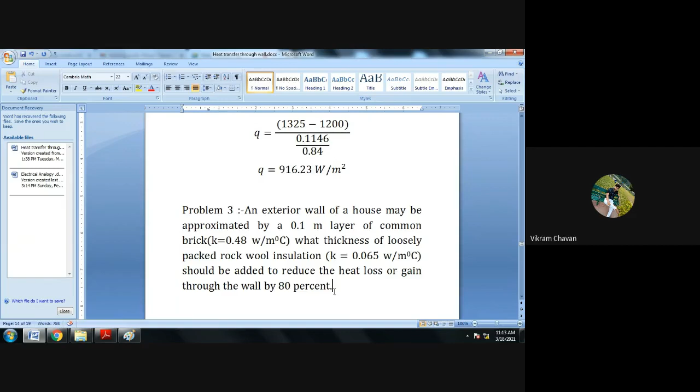So in simple language, a house is there with a wall made up of common brick, with thermal conductivity 0.48. We have to reduce the heat transfer, or heat gain, through that particular wall by 80%. So we need to find how much thickness of rock wool insulation should be provided on that wall. The given data is: thickness of common brick wall is provided, thermal conductivity of common brick is provided, and thermal conductivity of rock wool insulation is provided.

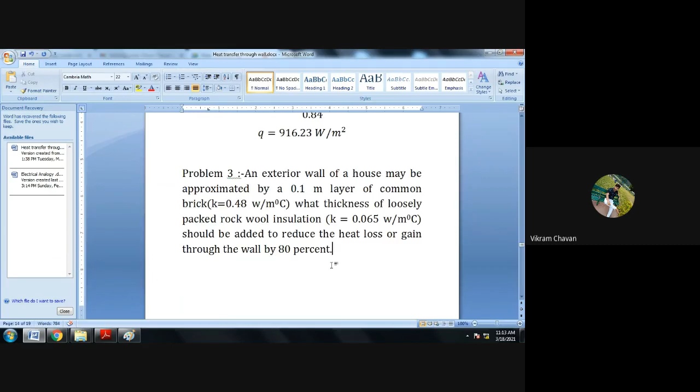We have to discuss further with this data. Okay, some mistake is there from my side. An exterior wall of a house may be approximated by a 0.1 meter layer of common brick, and the common brick thermal conductivity is 0.7, followed by...

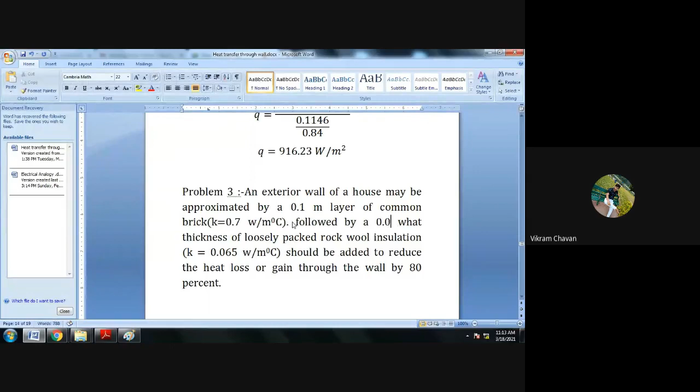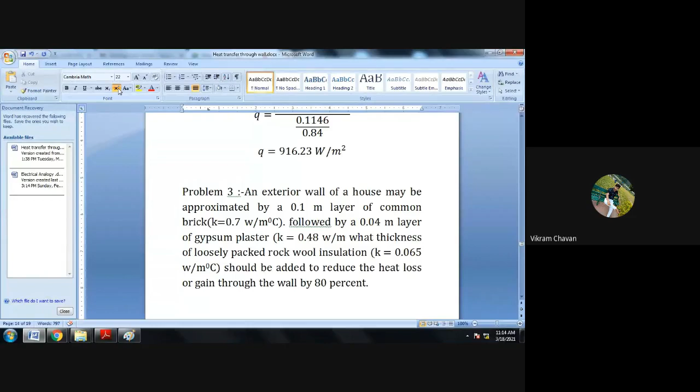...a 0.04 meter layer of gypsum plaster, with thermal conductivity provided as K is equal to 0.48 watt per meter degree Celsius.

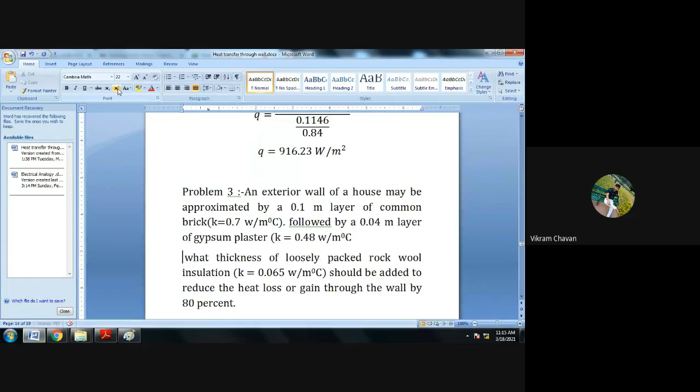Watt per meter degree Celsius. And then it is provided: what thickness of loosely packed rock wool insulation, K equal to 0.065 watt per meter degree Celsius, should be added to reduce the heat loss or gain through the wall by 80%?

So make the changes in the problem. An exterior wall of a house may be approximated by a 0.1 meter layer of common brick (thermal conductivity is 0.7 watt per meter degree Celsius), followed by a 0.04 meter layer of gypsum plaster (K is equal to 0.48 watt per meter degree Celsius).

What thickness of loosely packed rock wool insulation (K is equal to 0.065 watt per meter degree Celsius) should be added to reduce the heat loss or gain through the wall by 80%?

So the scenario is that the house wall is made up of common brick. Over that wall the gypsum plaster layer is provided, and through that particular gypsum plaster and common brick, some amount of heat is transferring across the wall, and we have to reduce that heat by 80% by adding rock wool insulation over the plaster. So what will be the thickness of that rock wool insulation?

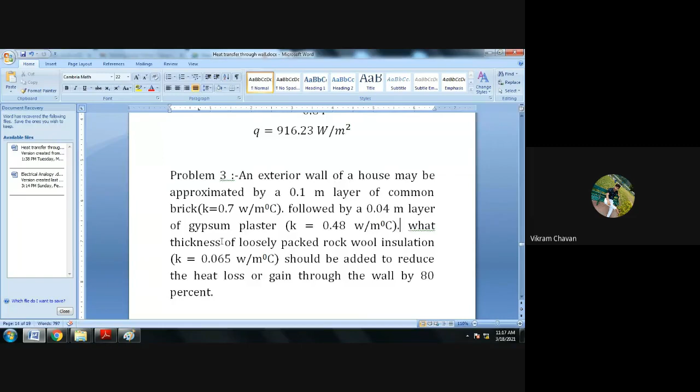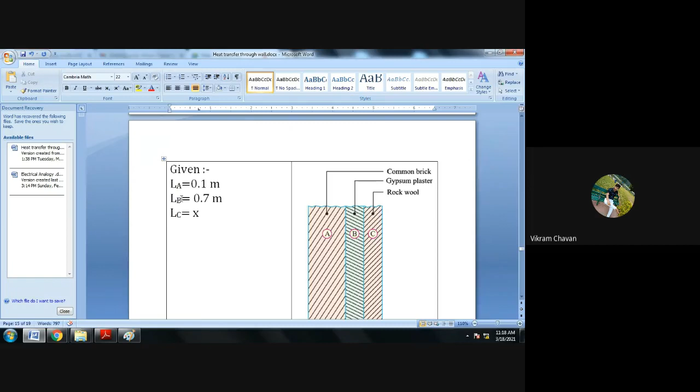Now the given data: the thickness of the common brick we consider as L suffix A, which is equal to 0.1 meter, and thickness of gypsum plaster is L suffix B, considering wall B as the gypsum plaster, with thickness 0.04 meter. We have to find out the thickness of rock wool.

Here is a diagrammatic representation you can follow in every problem for understanding purposes. What we are going to consider in the problem will be understood from the diagram only. So wall A is the common brick wall, wall B is the gypsum plaster wall, and wall C is the rock wool wall.

So the thicknesses of these walls are provided in the given data. Now we have to determine LC, that is the thickness of rock wool. Now initially, what are we going to consider?

We are going to consider that initially there is no rock wool insulation provided over the wall. So in that case, what will be the heat transfer? And in the second case, we consider when the rock wool insulation is provided, the heat transfer will be reduced by 80% of the initial heat transfer, when initially there is no rock wool insulation over the gypsum plaster.

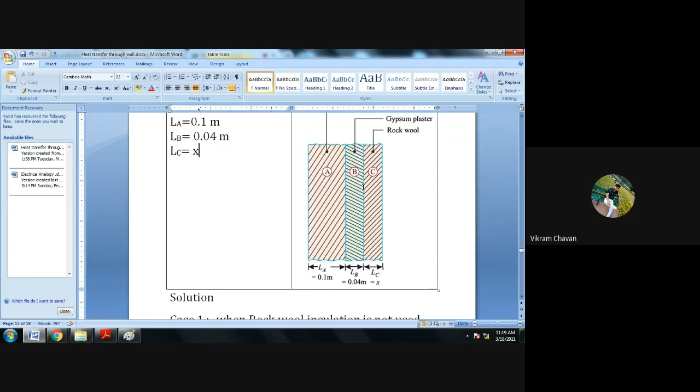So in this manner we have to solve this problem and determine the thickness LC, or the thickness of rock wool. So draw this diagram. For more visibility, you can rotate your screen and use the zoom in, zoom out feature of Google Meet.

So write down the given data: L suffix A is 0.1 meter, L suffix B is 0.04 meter, and L suffix C is X meter, which we have to determine. The unknown quantity is the thickness of rock wool insulation needed to reduce the heat transfer by 80%.

Also draw this simple one-dimensional diagram. Wall A is the common brick, wall B is the gypsum plaster, and wall C is the rock wool wall. Provide the thicknesses: L suffix A is equal to 0.1 meter, L suffix B is equal to 0.04 meter, and L suffix C is equal to X. We have to find out this X value.

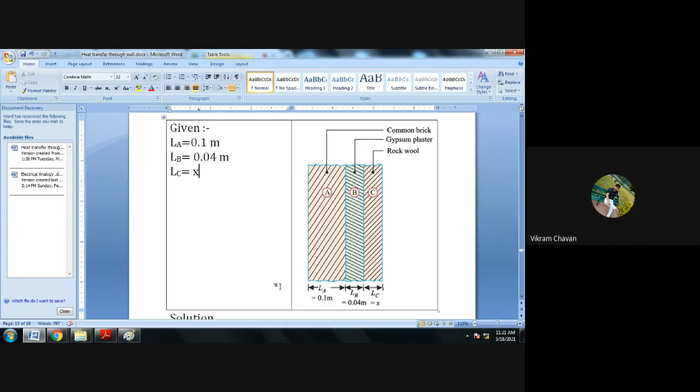So case one is when rock wool insulation is not used as the initial condition. In that case, the heat transfer across the wall we have to consider as Q1.

We can say the temperature difference across the two walls is dt, and it equals dt divided by the thermal resistance of the two walls. Thermal resistance of a wall equals L suffix A divided by K suffix A multiplied by area, where L suffix A is the thickness of wall A, K suffix A is the thermal conductivity of wall A, and area is the area perpendicular to the heat flow.

In a similar fashion, we add up the resistance of wall B, having thickness L suffix B and thermal conductivity K suffix B, multiplied by area. This is how we manipulate the equation according to the given data and parameters in the problem. This is what we have considered as case one.

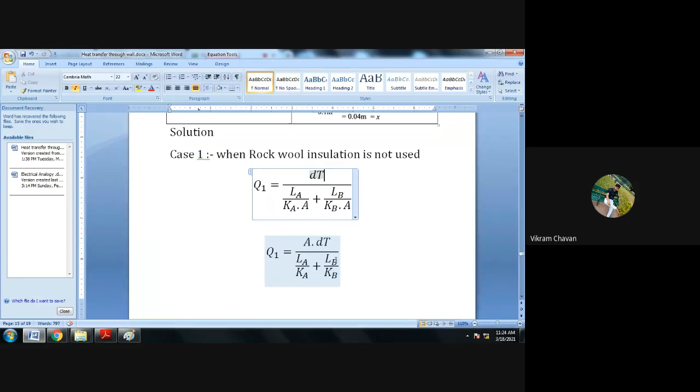L suffix A, K suffix A, and L suffix B, K suffix B go into the equation. So Q1, the heat transfer when we are not using the rock wool insulation, equals A multiplied by dt divided by thickness of wall A which is 0.1, with thermal conductivity of wall A as 0.7, plus thickness of wall B which is 0.04 divided by thermal conductivity of wall B which is 0.48. That is the heat transfer equation when we are not using the rock wool insulation.

Once we apply the rock wool insulation over the gypsum plaster, one more resistance will be added, and the heat reduction will happen by 80%. For that purpose we have to find out the thickness of the rock wool insulation.

So when rock wool insulation is used, what will be the heat transfer rate? Q2 equals A multiplied by dt, whole divided by L suffix A divided by K suffix A plus L suffix B divided by K suffix B plus L suffix C divided by K suffix C.

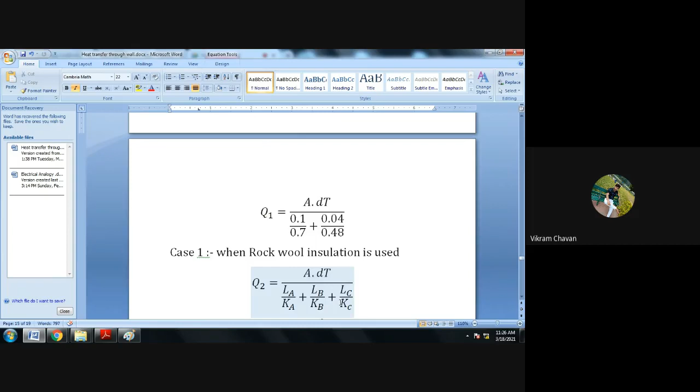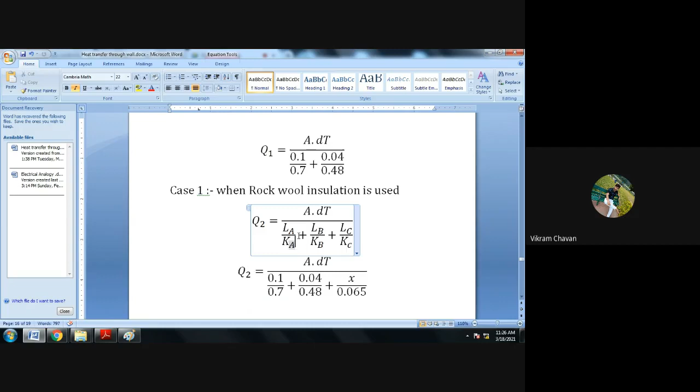We consumed this step by directly shifting capital A, the area, to the numerator side because it is common in all three terms. After getting this equation for heat transfer when rock wool insulation is used, we put in the values of all the thicknesses and thermal conductivities.

In this case, the value of L suffix C, the thickness of rock wool insulation, is unknown, so instead we consider it as X, which we have to determine. So the equation becomes A multiplied by dt divided by 0.1 divided by 0.7 plus 0.04 divided by 0.48 plus x divided by 0.065.

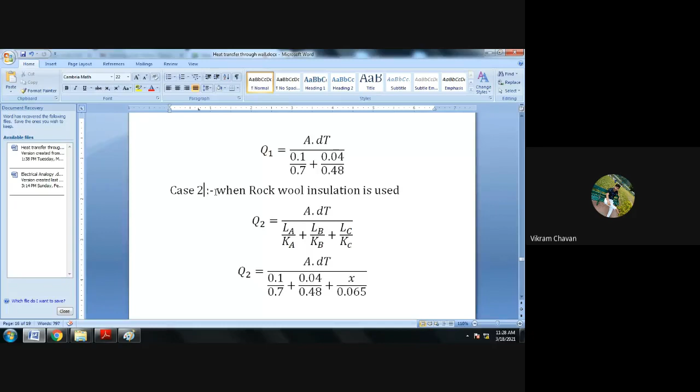Now further, according to the problem statement, we know that when we add up the rock wool insulation, the initial heat transfer rate will be reduced by 80%.

So Q2 is the heat transfer when the rock wool insulation is added. Q2 will be equal to 80% reduction in initial heat transfer. Initial heat transfer when there is no rock wool insulation present is equal to Q1. And reduction in that initial heat transfer, we have to write as minus 80% of Q1.

Q2 is the heat transfer when we add the rock wool insulation, and when rock wool insulation is added, then the heat transfer will be reduced by 80%. Initial heat transfer is when the wall is manufactured by using common brick and gypsum. So at that time, what is the heat transfer? And reduction in that heat transfer will happen by 80%.

So 80% of initial heat transfer will be reduced. So our equation will become Q2 is equal to Q1 minus 80% of Q1.

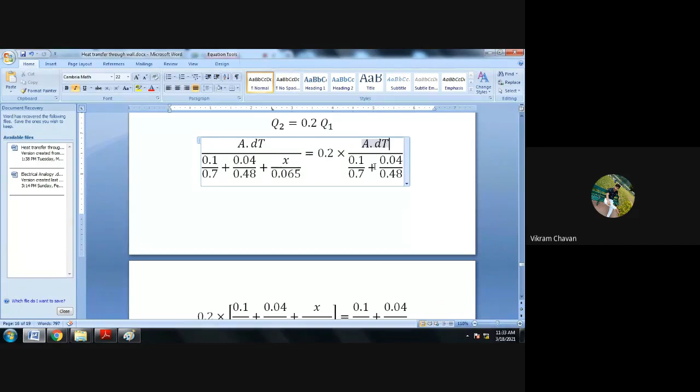So initially what we have done, we have done the cross multiplication: 0.2 multiplied by this bracket, and 1 multiplied by this bracket. ADT will be cancelled. So we will get the equation: 0.2 multiplied by the square bracket of 0.1 divided by 0.7 plus 0.04 divided by 0.48 plus x divided by 0.065, bracket complete, is equal to 0.1 divided by 0.7 plus 0.04 divided by 0.48. Now do the calculation.

First of all, do the fraction calculation, and then find out the x value. Tell me the x value. Is everyone getting how to solve these kinds of problems?

Do the calculation and find out the value of x. Tell me the value of x. You can comment in the chat box.

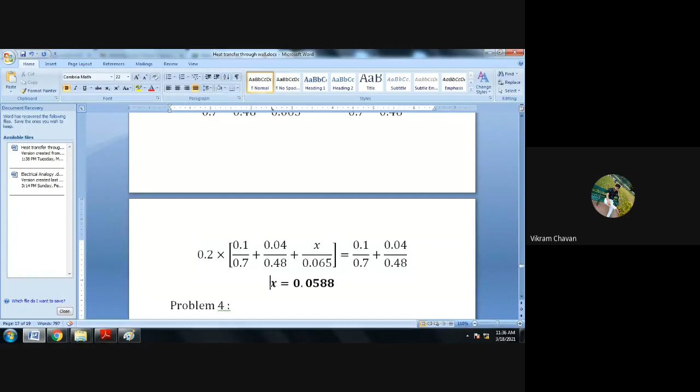Now, one more variety of this problem we are going to discuss in this particular lecture. Okay, so problem number 4. Write down the problem number 4.

Problem number 4. Find the heat flow rate through the composite wall.

So you can make it a very important problem in the sense of a gate examination. Find the heat flow rate for a 2 mark problem, through the composite wall.

As shown in figure. Assume one-dimensional heat flow. Write down 'one' also here.

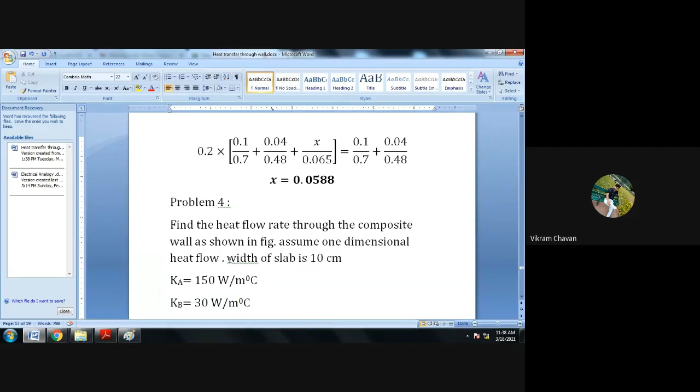Full stop. Width of slab is 10 centimeter. Write down the thermal conductivities of A slab, B slab, C slab, and D slab.

Thermal conductivity of A wall is equal to 150 watt per meter degree Celsius. Thermal conductivity of B wall is equal to 30 watt per meter degree Celsius. Thermal conductivity of C wall is equal to 65 watt per meter degree Celsius, and thermal conductivity of D wall is equal to 50 watt per meter degree Celsius.

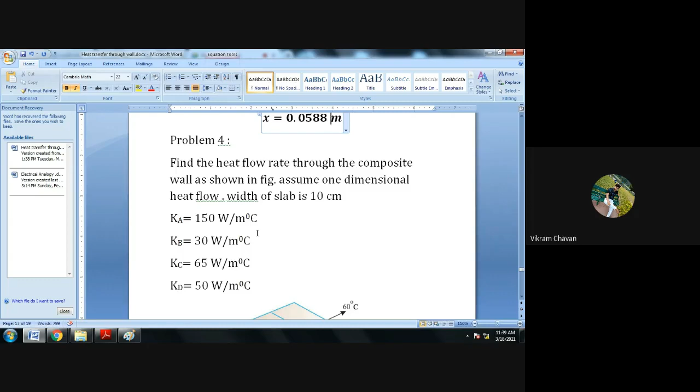Now, as shown in figure, figure is provided. If you want, draw a 3-dimensional figure, or if not possible, you can draw the 2-dimensional figure also, no problem. Now the composite wall is provided. Let's see the structure of the composite wall.

Now heat is flowing from this direction to this direction. Width of wall is provided as 10 centimeter. This is the width of wall, this is the height, and this is the thickness.

Total thickness is provided for each wall. So this is the A wall, this is the B wall, this is the C wall, and this is the D wall. It is not a general wall like we discussed before, where each wall had the same area. Here the area differs as per the wall structure.

Now heat is flowing in this direction. The temperature of this face is provided as 400 degrees Celsius, and the temperature of this face is provided as 60 degrees Celsius. Now the first wall is A, second is B. We can say that B and C are parallel to each other, and D is in series.

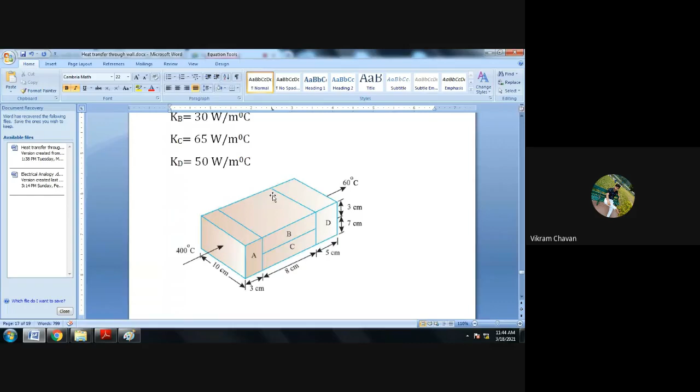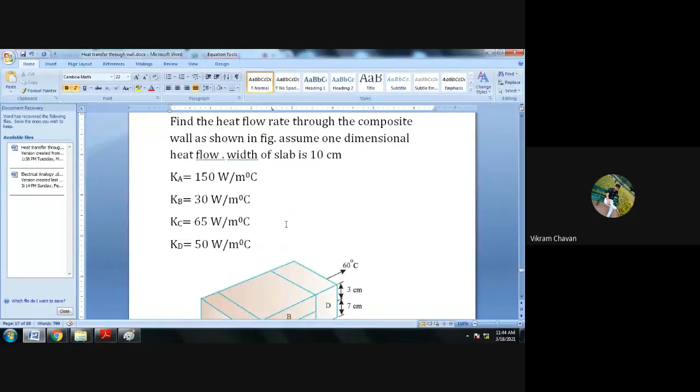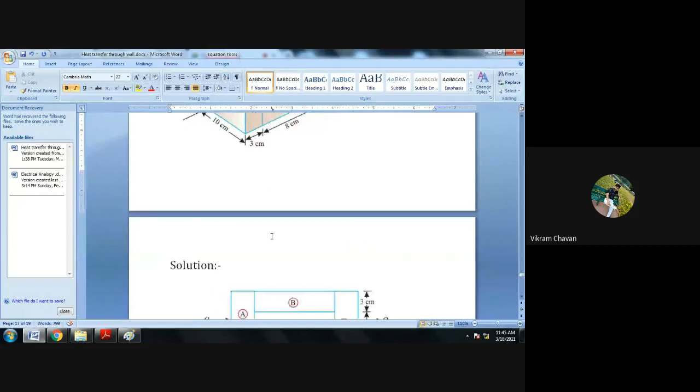Shall we move ahead? Once you have drawn the given figure, we need not consider the three-dimensional figure. This is the three-dimensional figure, but we have to carry out only one-dimensional heat flow. So we have to convert this three-dimensional figure into a two-dimensional figure.

For that reason, we have considered this two-dimensional figure, the conversion of the given figure: wall A, wall B, wall C, wall D. So heat is flowing in this direction. We have provided the heat flow from wall A to wall D, from the outer surface of wall A to the outer surface of wall D, and all the dimensions are given.

Wall A is in series with wall B and wall C, but wall B and wall C are in parallel with each other. Wall D is in series with wall B and wall C. So in a similar fashion, we have to formulate or draw the electrical circuit for this particular composite wall.

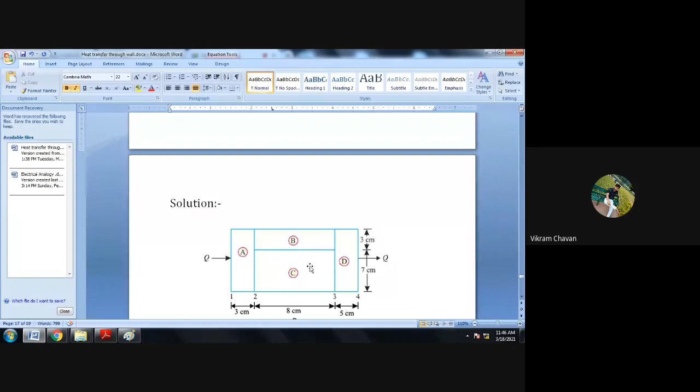The initial temperature is 400 degrees Celsius and the final temperature is 60 degrees Celsius, with heat flowing from the external surface of wall A to the external surface of wall D. So RTH-A, the thermal resistance of wall A, will be in series, whereas the thermal resistance of wall B and wall C are in parallel, and the thermal resistance of wall D will be in series.

Is everyone getting this? Whether you understood the two-dimensional diagram and the electrical analogy circuit for this particular wall.

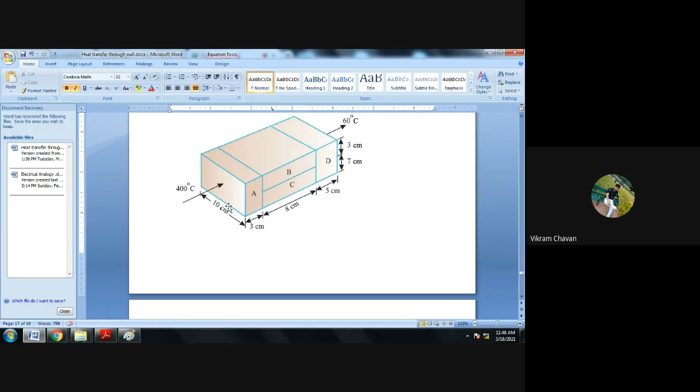Perpendicular surface area of wall A is 10 centimeter multiplied by 10 centimeter, height multiplied by width. That is 0.1 meter multiplied by 0.1 meter, which equals 0.01 meter square. That is the perpendicular surface area of wall A.

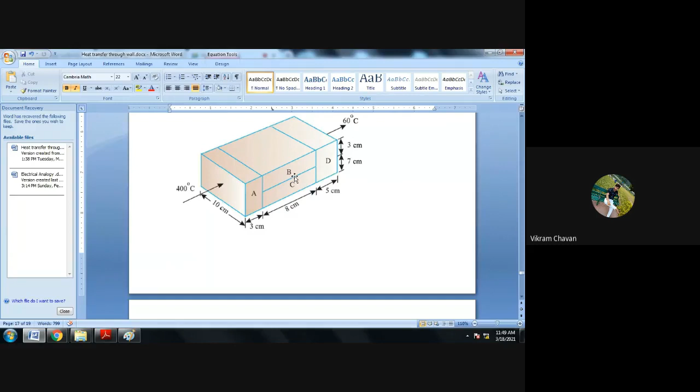In a similar fashion, the perpendicular surface area of B wall equals 0.1 width multiplied by height. B wall height is 3 centimeter, so 0.1 multiplied by 0.03, which gives us the area of B wall equal to 0.003 meter square.

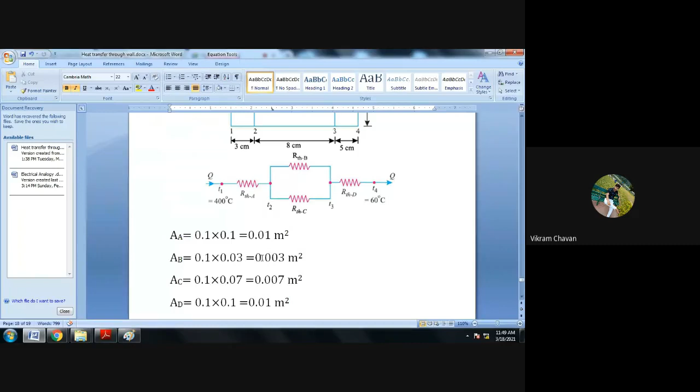In a similar fashion, area of C wall equals width 0.1 meter and height 0.07 meter, which is equal to 0.007 meter square.

Area of D wall, perpendicular surface area of D wall, equals 0.1 multiplied by 0.1, because width is 0.1 meter and height is also 0.1 meter for the D wall. Height for the D wall is 3 centimeter plus 7 centimeter, which equals 10 centimeter, that is 0.1 meter. So the area of D wall is equal to 0.01 meter square.

Now next we have to determine what is meant by heat transfer in a composite wall. We have discussed that heat transfer in a composite wall equals the total temperature difference, initial temperature minus final temperature, whole divided by the addition of all the thermal resistances.

We know the initial and final temperature, but it's not easy to calculate the thermal resistance of parallel slabs. In case of series slabs, it's just the addition of two thermal resistances. But in case of parallel slabs, we have to determine the equivalent resistance, and then that equivalent resistance will be in series to another resistance. So first we have to determine the thermal resistance RTH A, RTH B, RTH C, and RTH D.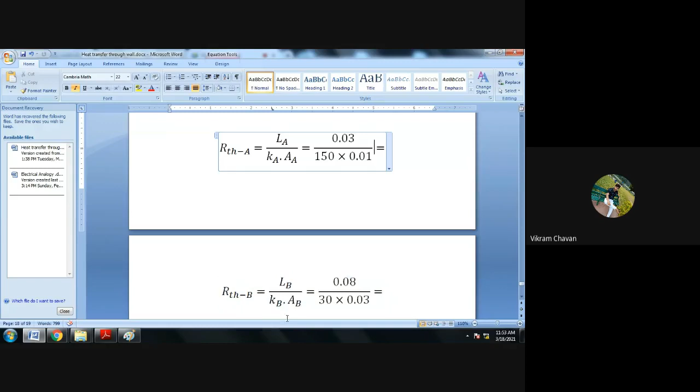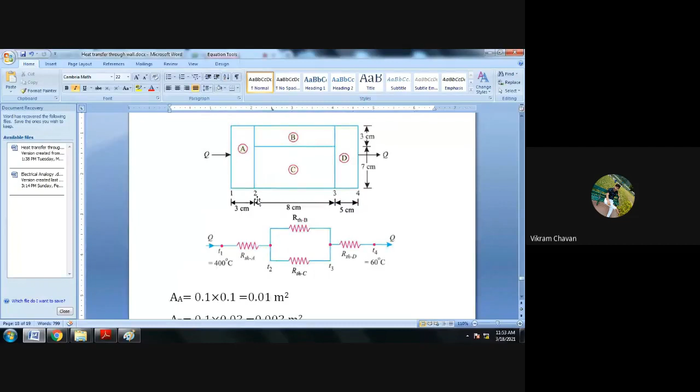In similar fashion, the thermal resistance for wall B, RTH suffix B, equals L suffix B divided by K suffix B multiplied by A suffix B. L suffix B is the thickness of wall B, which is 8 centimeter, as you can see for wall C as well. So we put the thickness as 0.08, and the thermal conductivity of wall B is 30 watt per meter degree Celsius, and the area for wall B we have calculated as 0.03.

Then calculate RTH. Okay, here the thermal conductivity of wall B is 30, and the area for wall B is 0.03.

Similarly for wall C and wall D, we have to calculate the thermal resistance. Calculate the thermal resistance and put up your answer. What is the thermal resistance for wall A? Please let me know in the chat box.

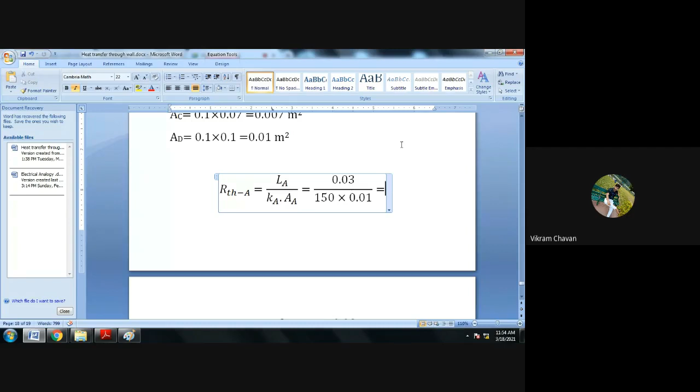Thermal resistance of wall A. You can comment in the chat box. 0.02. Right, 0.02. Okay, then wall B.

Wall B thermal resistance. Do calculation everyone, because this will provide you good hands-on calculation. Wall B, 0.89. Okay, 0.89 wall B thermal resistance.

Wall C thermal resistance. Please let me know wall C thermal resistance. LC divided by K suffix C multiplied by A suffix C. So LC 0.08 divided by 65 multiplied by 0.07.

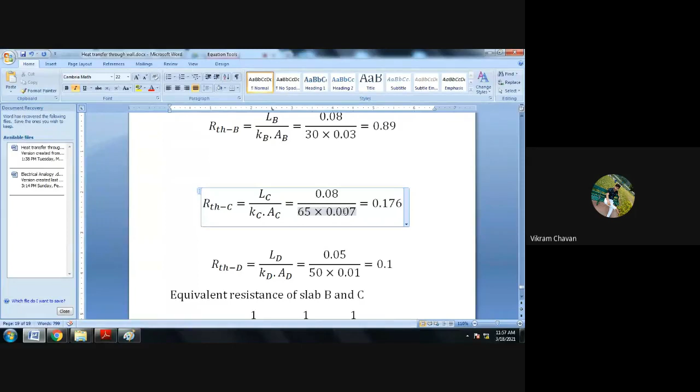Okay, A suffix C. Is there any problem? A suffix C. 0 point... 0.07. Okay, right now, 0.007. Right now, ah, right, 0.007. Thank you for the correction.

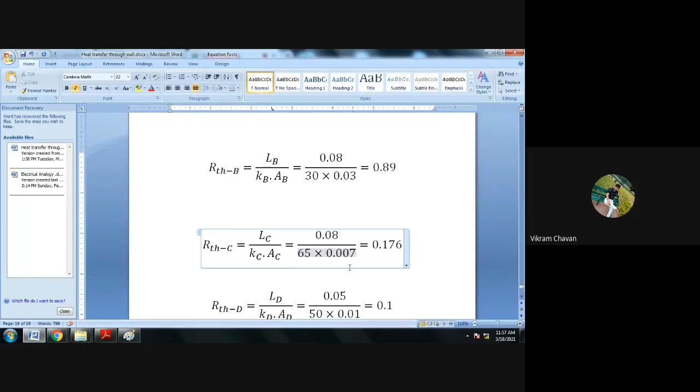Okay, so wall D thermal resistance is 0.1. Great, okay. Now we have discussed that addition of series resistance, it will be easy. But if you want to add the parallel resistance, in that case we have to determine the equivalent resistance. Once you determine the equivalent resistance, then it will be easy to add up all the resistance.

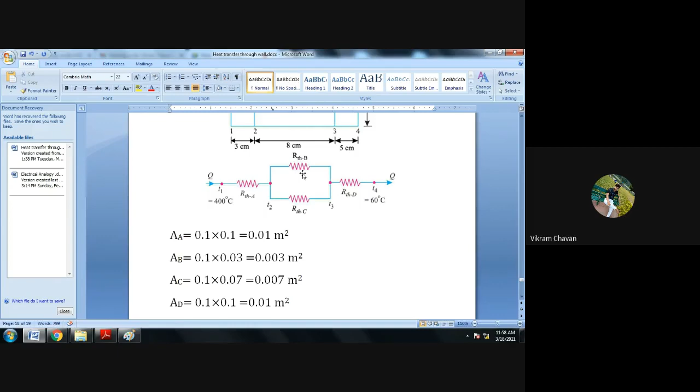So equivalent resistance means what? It will provide the resistance, equivalent resistance in series. So we have to determine the equivalent resistance for slab B and slab C. That will provide you equivalent resistance for slab B and slab C.

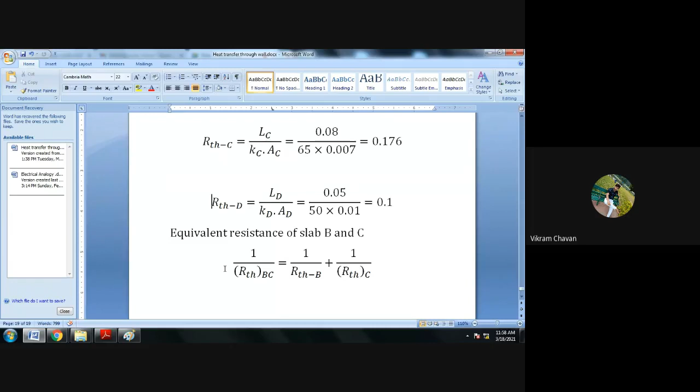We know that if we want to perform the addition of parallel resistance, we have to do the addition in this particular manner. So 1 upon equivalent resistance will be equal to 1 upon resistance of wall B plus 1 upon resistance of wall C.

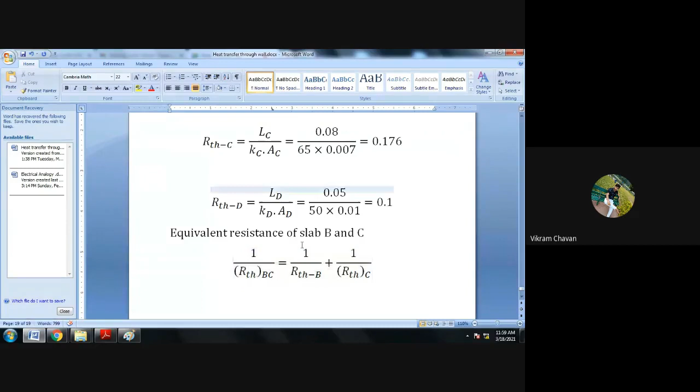So we'll get the equivalent resistance as 1 upon RTH BC is equal to 1 upon RTH B plus 1 upon RTH C. So further what we have to do, we have to cross multiply this and find out the RTH BC.

Insert equation: 1 upon RTH BC is equal to, do cross multiplication. So after cross multiplication, in bracket, or we will take the division, RTH B plus RTH C divided by RTH B multiplied by RTH C. Okay, so we will get this equation.

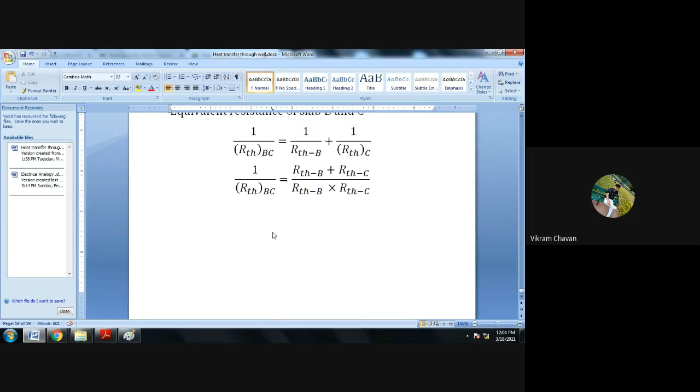And then calculate the RTH BC. Tell me the value RTH BC. 0.1461. Right, okay, calculate RTH BC. Zero point 147. Okay, I'm getting 0.147.

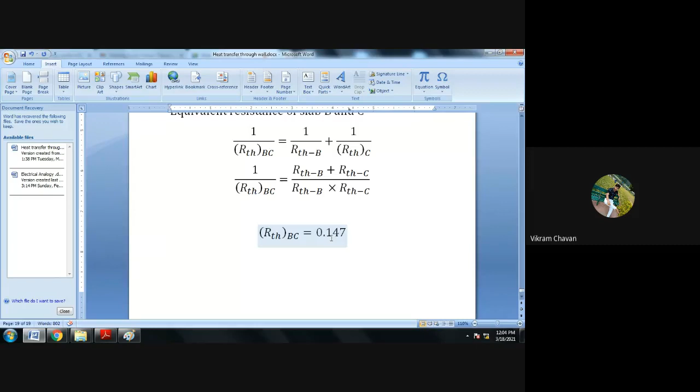Okay, so once you calculated the equivalent resistance, now it will be easy to calculate the total resistance. RTH total, calculate the total resistance. Now it will be addition of RTH A plus RTH BC plus RTH D.

RTH A plus RTH BC plus RTH D. Okay, so what it is, we will get the R total. RTH total will be equal to RTH A plus RTH BC plus RTH D.

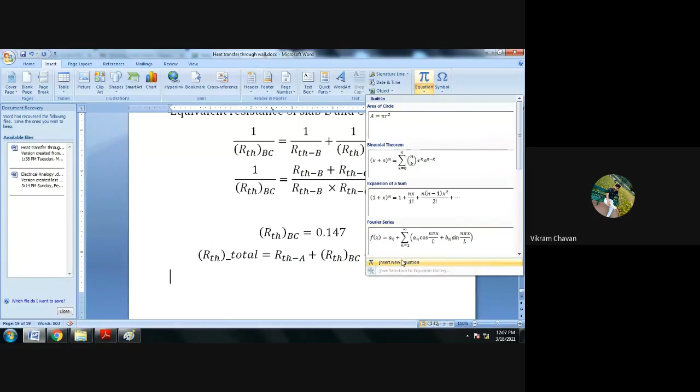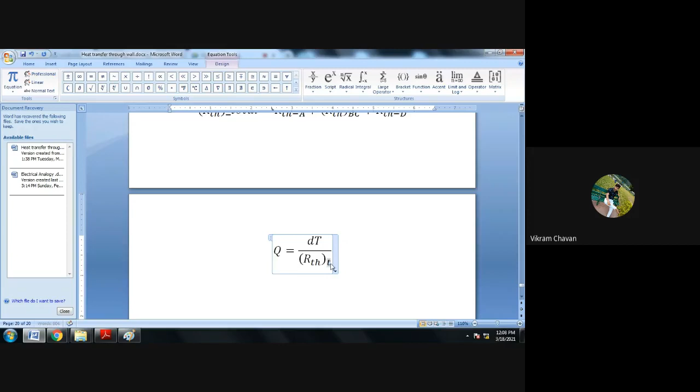So Q is equal to dt divided by, in bracket, RTH total. So calculate Q, okay, dt divided by RTH total.

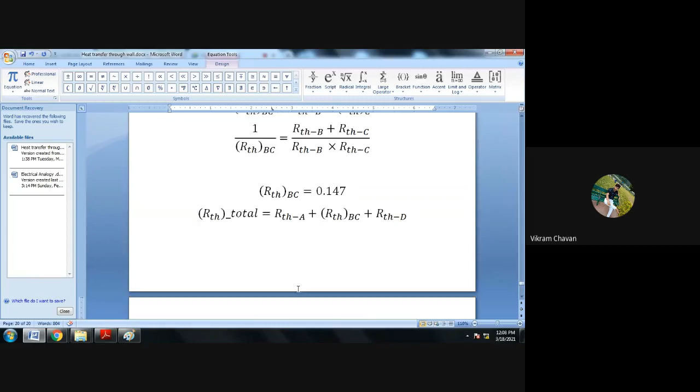Calculate Q value. So first of all, what we have done, we have find out the equivalent resistance for the parallel circuit. Then we converted it into equivalent series resistance, and then we have added all three resistance: RTH A plus RTH BC, which is the equivalent resistance for B and C in parallel, plus RTH D which is in series only. So we have added these three resistances.

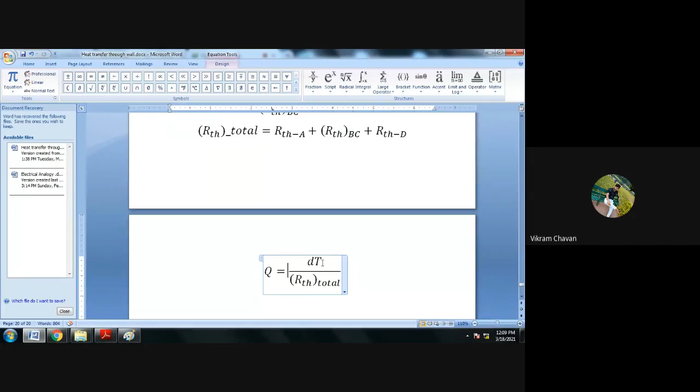Then we know that our heat transfer rate formula is dt divided by total thermal resistance. So once total thermal resistance is calculated, dt is T1 minus T2. T1 is the initial temperature, 400 degrees Celsius, and final temperature is 60 degrees Celsius. So overall temperature difference becomes 400 minus 60, whole divided by total thermal resistance. Please tell me the value of Q.

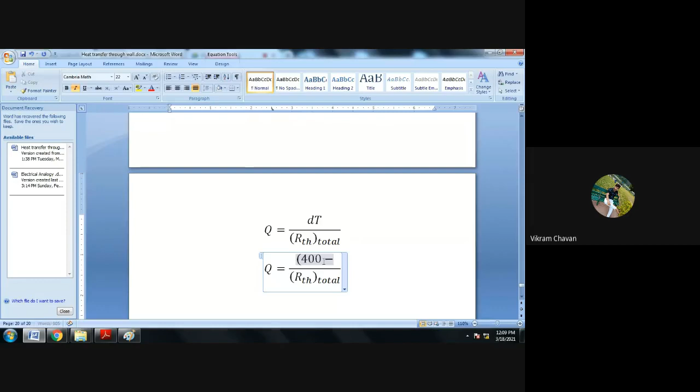Value of Q. Okay, dt, if you want to write here as 400 minus 60. So this is the total temperature difference. And how much have you calculated RTH total? Whether it is 0.267, RTH total is 0.267. Now calculate Q.

Calculate Q. Okay, right. So many students are calculating and getting the answer as 1273.40. Great, right answer. Everyone getting the right answer. So Q will be equal to 1273.4 watt. This is the answer.

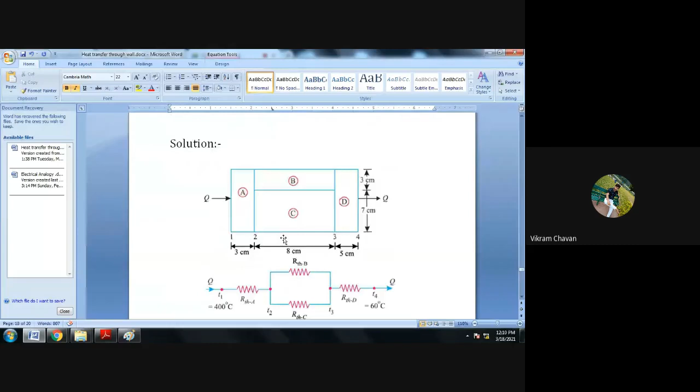Getting everyone, how to solve the problem. If such a composite wall problem is asked in the examination, then how to solve it. First of all, we have to find out all the thermal resistance. We have to first convert the diagram into one dimensional diagram, and draw the electrical analogy diagram for the composite wall. Then we'll come to know which resistances are in series and which are in parallel. Then those parallel resistances we have to convert into equivalent series resistance.

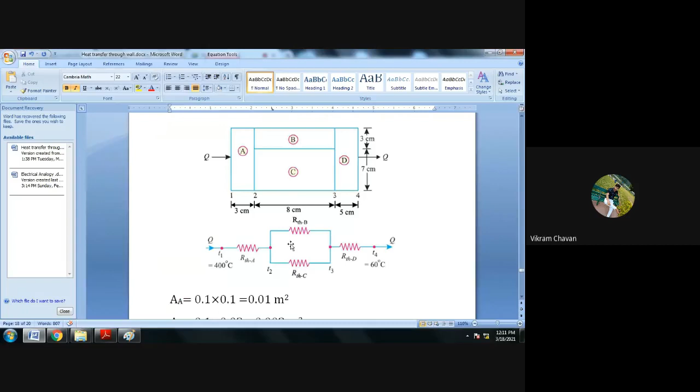Once converted into equivalent series resistance, add up all the resistance which are in series. Once you add up the resistance, we will get the total resistance, and we know that the heat transfer across the composite wall will be equal to the initial temperature minus final temperature, whole divided by total thermal resistance, and that will provide you the total heat transfer across the composite slab. Getting everyone? Now there is no doubt about this composite wall.

How to solve composite wall problems where walls are in parallel, or series-parallel combination. In that case, we have to use this consideration of parallel combination and series combination. In case of series combination, it will be very easy to add up the thermal resistance. But when the walls are in parallel, in that case we have to consider the equivalent resistance.

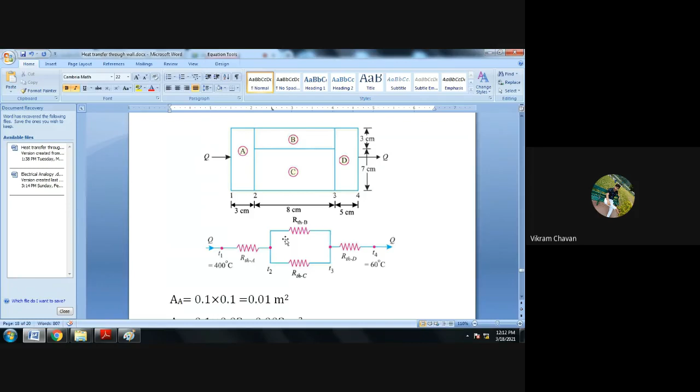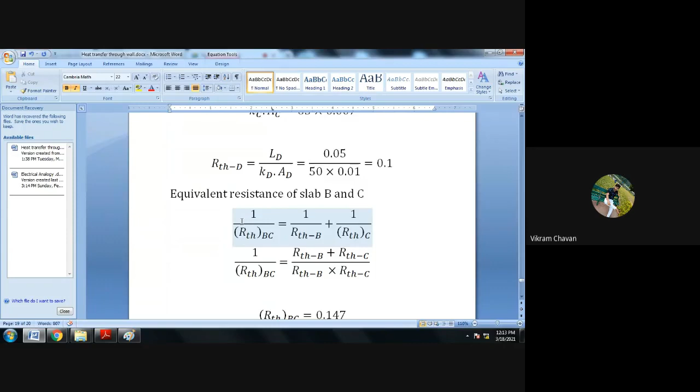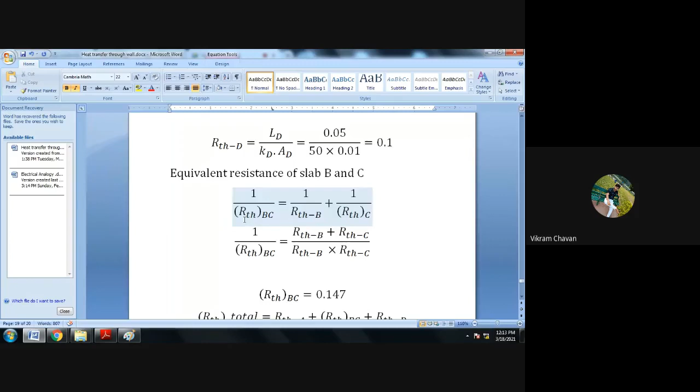So how have we converted equivalent resistance? Great, great. So we just applied the electrical analogy. In electrical analogy, parallel circuits are converted into an equivalent series circuit. That methodology we have used here, finding out the equivalent resistance for the parallel resistance. And once converted into equivalent series resistance, then it will be easy to find out the total thermal resistance. So by adding all the resistance in series format, we can find out the total resistance.

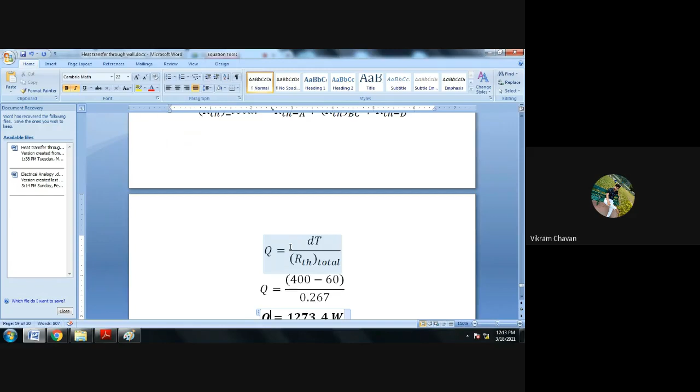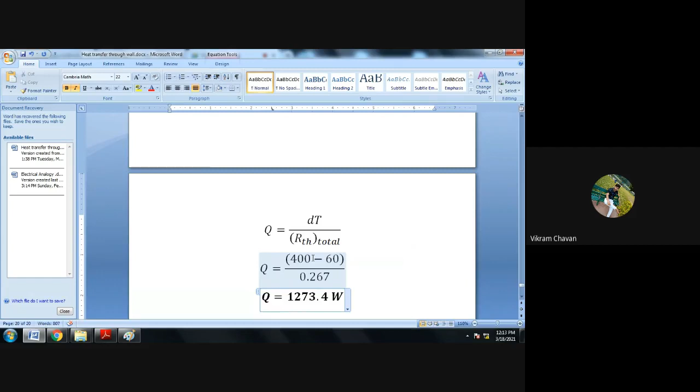And once you determine the total resistance, we know that Q in a composite wall is equal to overall temperature difference divided by total thermal resistance. So just put up the overall temperature difference, that is initial temperature minus final temperature, whole divided by total thermal resistance. You will get the Q value at 1273.4.